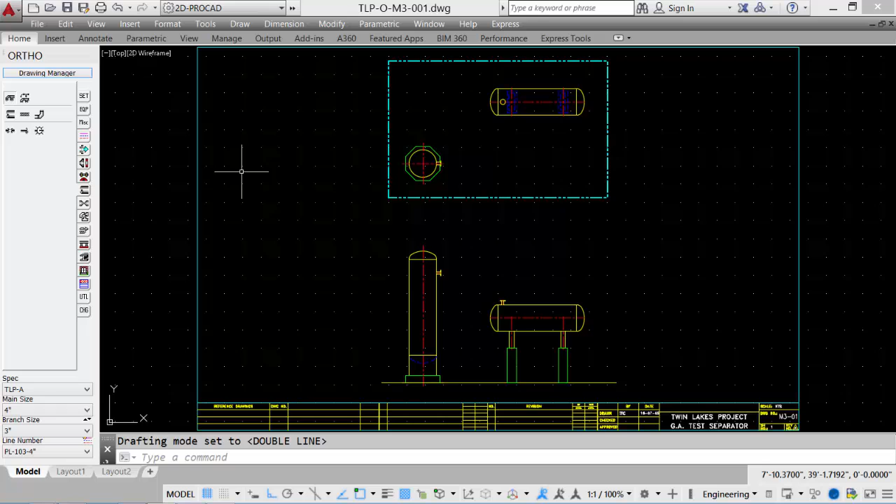Let's zoom up on the side of our drawing before placing any components on our equipment, and look at how the pipe tools work. Selecting our pipe tool, it asks for a start point and an end point, and a pipe is drawn. We change our pipe size to 8-inch and place pipe randomly. The drawing scale for this drawing is 1/8 inch equals 1 foot, so we can see the deviation between 4-inch pipe and 8-inch pipe.

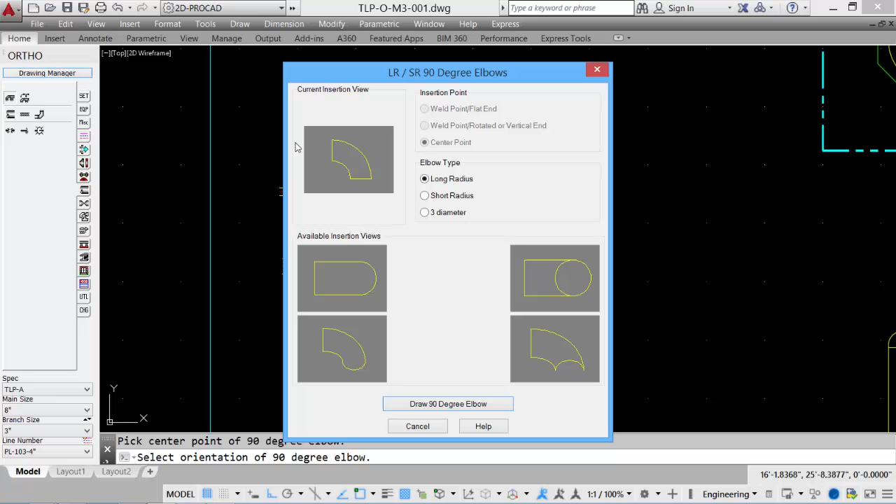There's a tool for adding pipe and an elbow. I can add one elbow or two; I'll just show one. We pick a start point, the center of the 90-degree elbow, and it asks which orientation we'd like, with options available and a default current selection. Then we draw a 90-degree elbow. It asks for a side for the elbow, and we can either pick down or up.

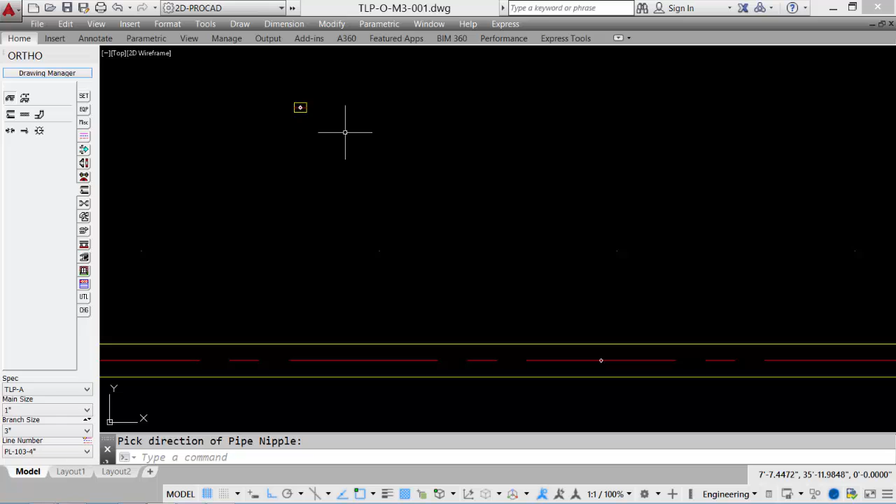There is a pipe nipple tool, so when we're down under 2-inch or less, let's go down to a 1-inch pipe size. We can now place a pipe nipple, and it asks whether you want it threaded both ends or plain one end. There is our pipe nipple at 1 inch to scale. We'll go back to 4-inch.

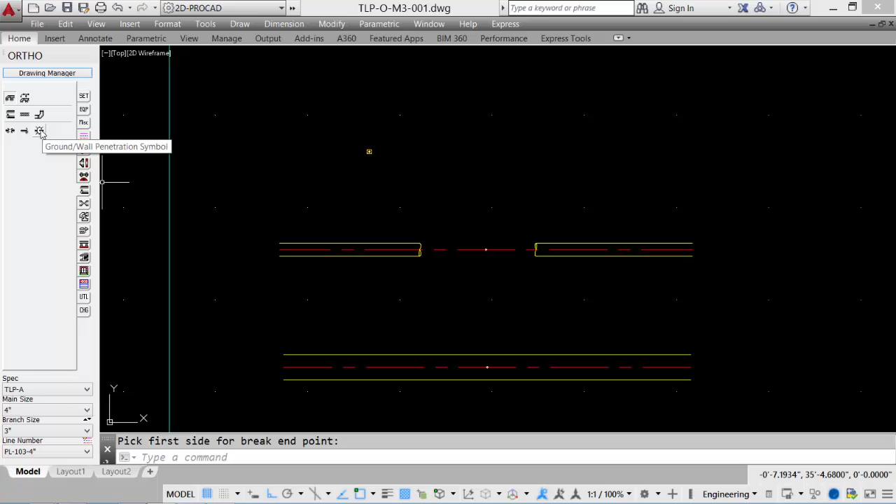Some of the other tools we have are the pipe ends. If we need a pipe break, we can pick one side of the pipe, the other side of the pipe, and then a distance along the pipe, and it breaks the pipe and shows our pipe break symbols. We can also put in a pipe end symbol or ground or wall penetration symbol by selecting our pipe, the other side of the pipe, and then the direction, and it puts in a pipe penetration symbol showing it going through the floor or through the wall.

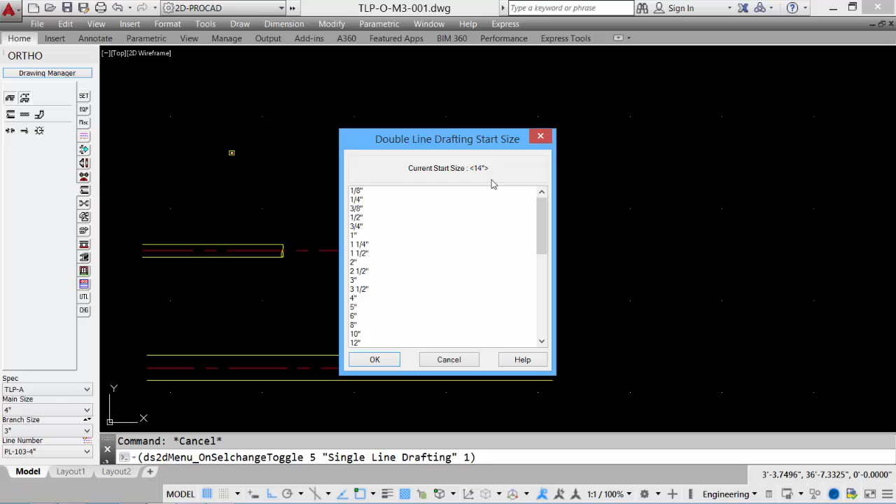In this case, let's set it to single line drafting and take a quick look. It always asks for when we want double line. Even though we're in single line, a lot of companies have a starting size of 14 and larger always drawn as double line, even though it's a single line drawing. So we'll just take the default.

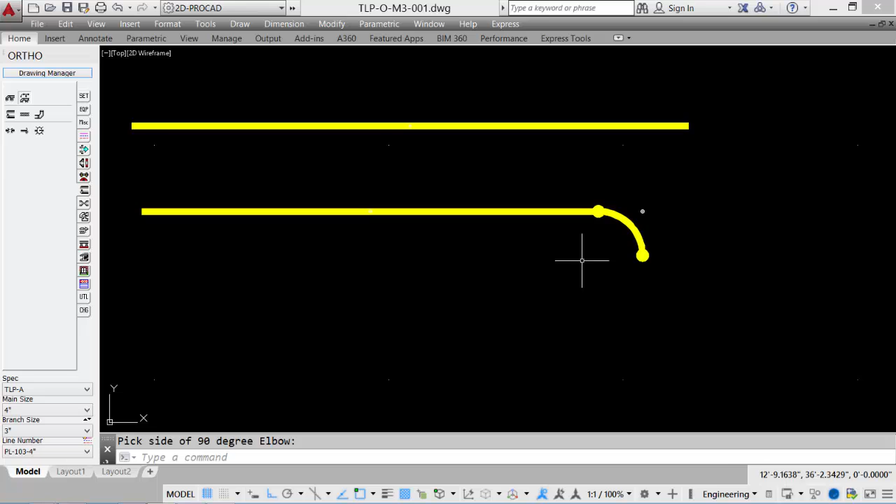Again, set it to 4-inch. Let's place some pipe, and now it shows up as a solid, thick line. Pipe with an elbow, take the default, point down this time, and now it shows the pipe plus a 90-degree elbow in single line. We'll set it back to our default.

Our next topic is the components. Now that we've covered the pipe and looked at all the different pipe options, let's look at all the other components. We have flanges, gaskets and bolts, all our different types of valves from gate valves to globe valves to ball valves, and all of our piping fittings: elbows, 90-degree to 45-degree, reducers, swedges, T's and reducing T's and crosses.

And things like weldolets, sockolets, and threadolets, all of those types of components that can be placed, all to scale, and all set by our spec, main size, branch size, and line number. So again, we always make sure we set this and change it as we draw to make sure we're getting the right components.

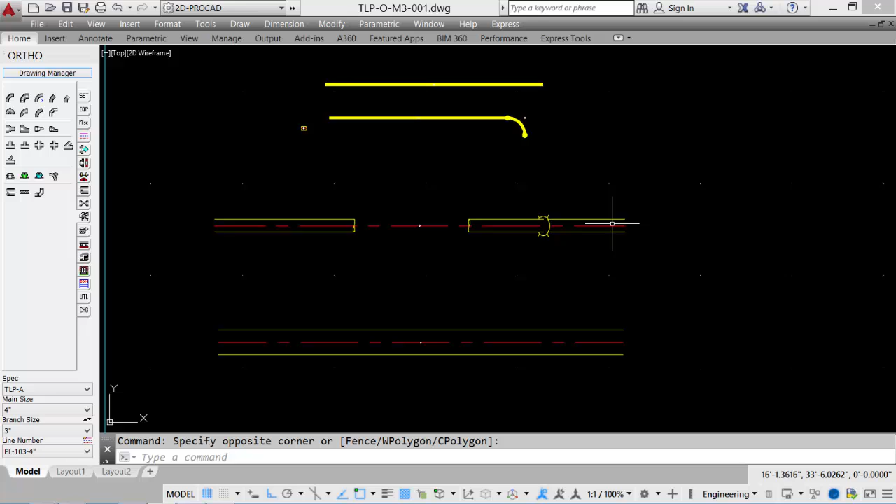But let's take a look at some of the basic components, things like a 90-degree elbow. Let's say I want to put a 90-degree elbow at the end of this pipe. Select our 90-degree elbow tool, and the dialog appears, allowing us to set the insertion point, either the weld point or the center point, and then the type of elbow we want placed.

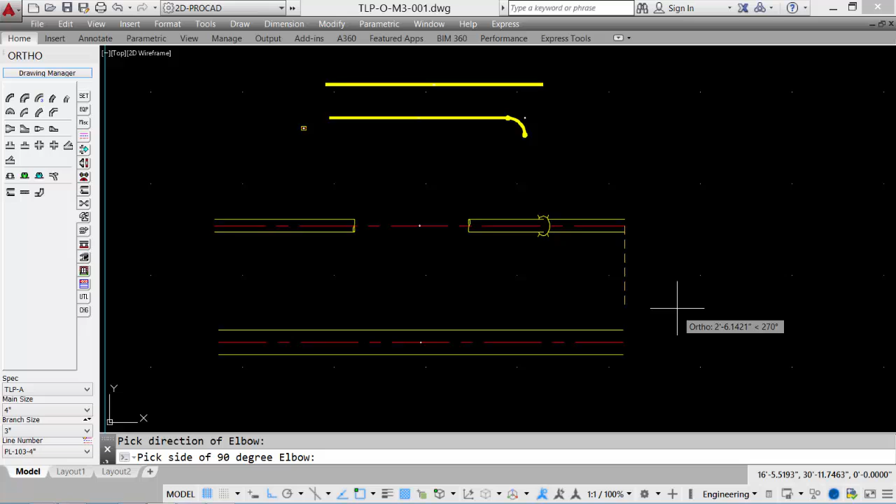It's a long radius elbow by default. Click Draw 90-degree elbow and pick the end of this pipe. First, choose the direction of the elbow, down or up. We'll go down in this case, and it attaches the elbow to the end of the pipe.

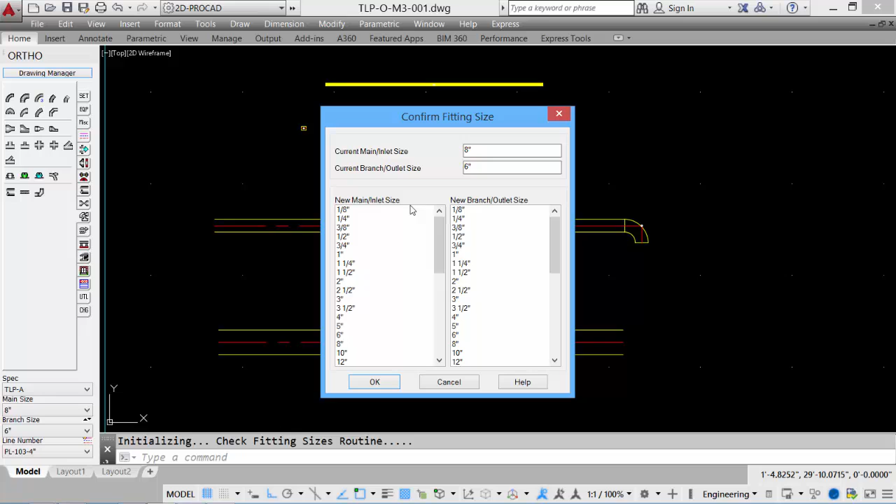We can come down to our sizes. Set our main size to 8-inch, branch size to 6-inch, and select a concentric reducer. It shows us the sizes, which can be changed, but we're picking up the current sizes, so we'll say OK. I'll pick this end of the pipe direction, and it now puts in an 8x6. Notice in the status area that our main size has automatically switched to 6-inch from 8-inch.

Let's look at placing a flange on our drawing. Select the flanges tool, select a weld neck flange, select the insertion point, and we'll select the weld point. Click OK, pick the end of the reducer, and the direction. Our 6-inch flange is now placed.

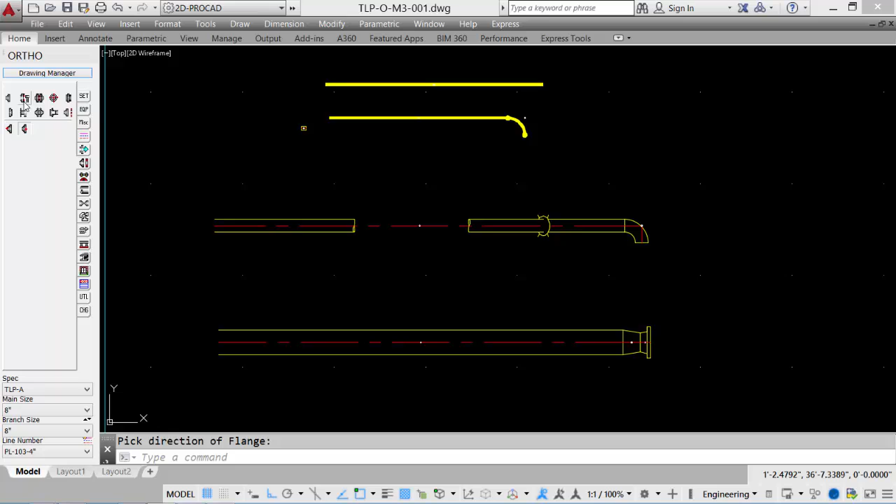Let's place a flange at this end, and we'll include a gasket and a bolt. First, we'll set our pipe size to 8-inch, then select the flange gasket bolt tool. Again, select the weld point, click OK, pick the end of the pipe, drag to the left, and it puts in a flange and gasket bolt. These symbols will not plot—they're on a layer called Defpoints and don't plot, but they're shown so the drafter can see that the gasket and bolts were actually placed within the drawing.

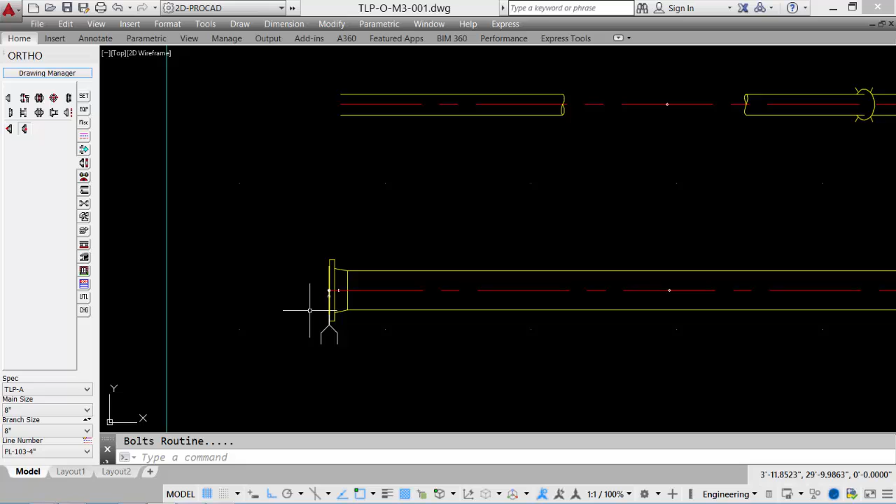We can place a flange off of this elbow here, then go to a 4-inch size. So again, I'm changing my size as I draft—pick the flange, then pick the end of the elbow and drag down, and the flange is placed in that orientation.

Let's look at placing some valves. I'll go to my valve tab, where all the different valves are displayed. You can set it at flange, gasket, and valve; gasket, valve, gasket, and flange—so if I had an existing flange I want to draw from. Or if I just wanted to put in a full complete flange and valve set, it would be flange, gasket, valve, gasket, and flange.

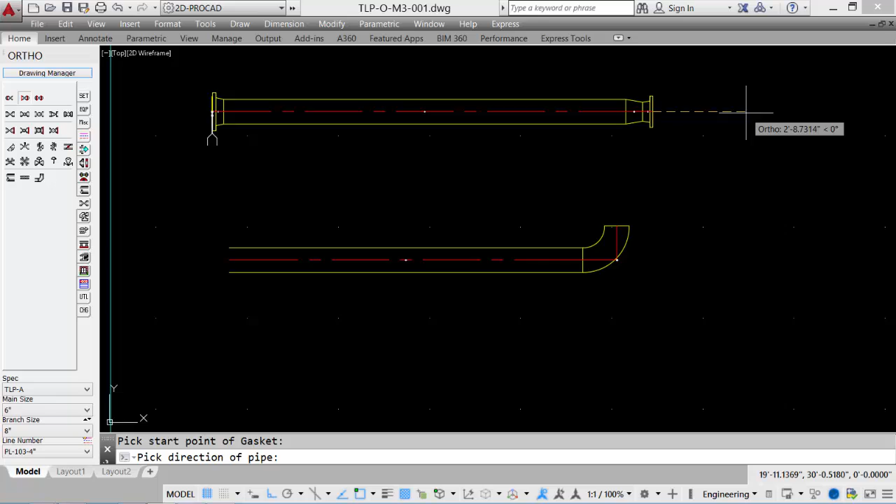Let's just put in a valve off of the end of this pipe here. First I'd set my pipe size—we know that's 6 inches. I have an existing flange but no gasket, so I'd set it to the second item. Then let's just put in a gate valve. Pick up the end of the flange, pick the direction, and it now adds the gasket and bolts in.

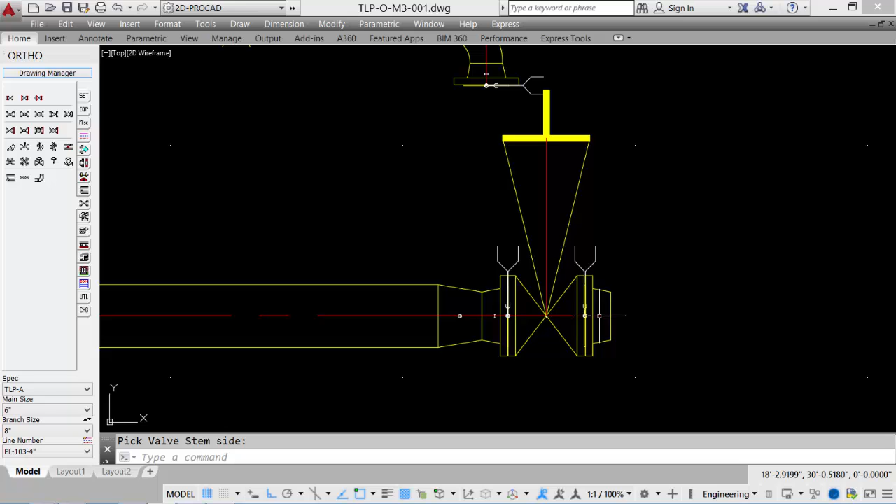Then it asks if I want a valve stem, and we can say yes or no. If we say yes, what orientation do we want—plan, side, or rotated? We'll say side, say OK, and pick the side we want the hand wheel to show up on. Then it completes the valve—there's the valve stem, another gasket, and another flange. So placing components is quite simple, just a matter of setting our size and then selecting the components.

The next topic is info blocks. Once we've completed or worked on a drawing, we want to know what size a pipe or component is. Under our settings tab, there's an item info tool that lets us select, for instance, the pipe, and it tells me it's 8-inch pipe. It tells me the spec, the line number, and a description—all set up in our spec generator.

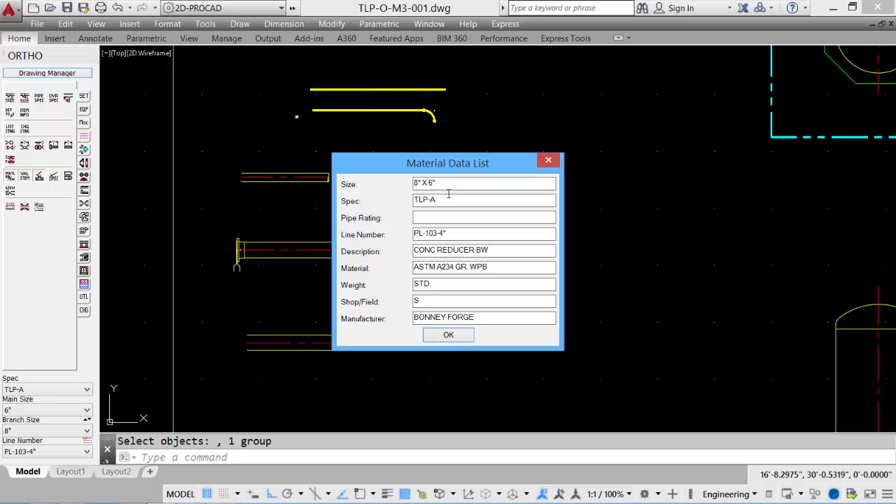So it's a good way of finding out what size components are if we're not sure. I selected my reducer, an 8x6 concentric reducer, and all of that information is shown.

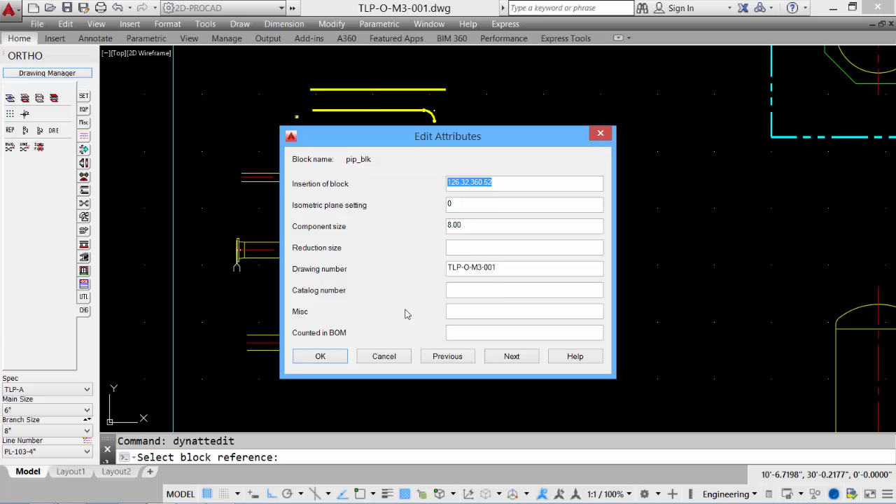For a more detailed view of a particular component, under the Change tab we have our Dynamic Attribute Edit tool, which lets us edit the information shown on a component. It also shows the component name and the file location within the software—so if you're looking for the exact file where that pipe is located, it tells us the spec, the location, and the component. We can select Next, and it tells us the information, dimensional data, and all the information regarding that symbol—very useful if you're editing or adjusting the spec or material data files.

The last topic in Module 3 is the autoroute feature. We'll look at placing components automatically, and then we'll look at placing in our drawing the piping in the plan view and in the elevation. So how the autoroute feature works is it allows us to, rather than having to pick the end points for instance, placing that elbow, I can have the system automatically do that.

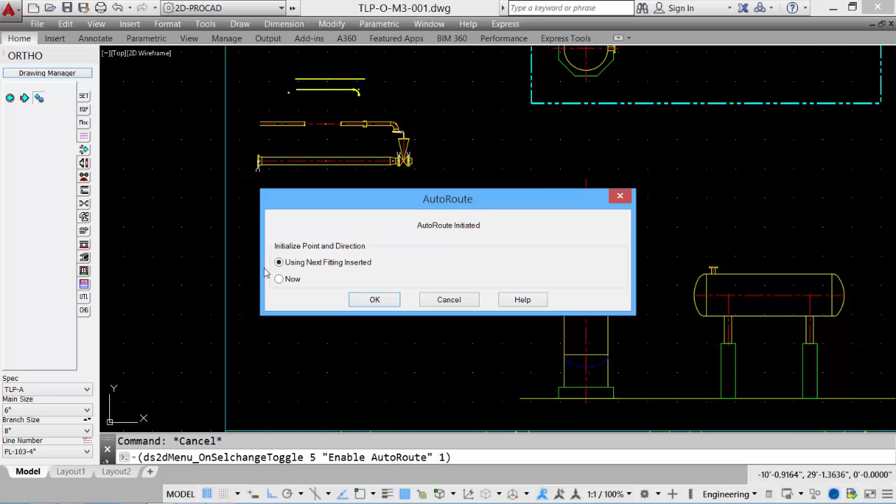So we'll go to our autoroute feature, and we'll enable the autoroute. It asks if we want to start it now or using the next fitting. I'll just use the next fitting. And now I've set up my sizes. Let's say we'll set it to 8-inch to 6-inch, just for this sample. And then we'll go in and place some pipe. Click our pipe tool, and it places pipe like normal.

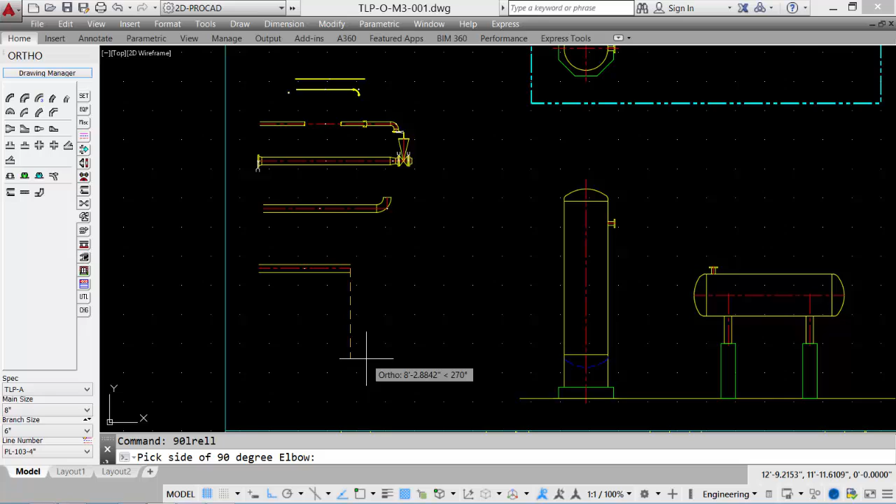But now, when I add my next component, let's say we add an elbow to turn down. Say draw a 90-degree elbow. I don't have to pick my start point. It's automatically selected as the last point. So all I have to do now is pick the side of the elbow, and the elbow is drawn. I can then pick some pipe, and the start point of the pipe is automatically at the end of the elbow. Place another elbow. This time I'll go to the right, and it automatically places the component. So as long as we know the dimensional data, we can quickly route the pipe.

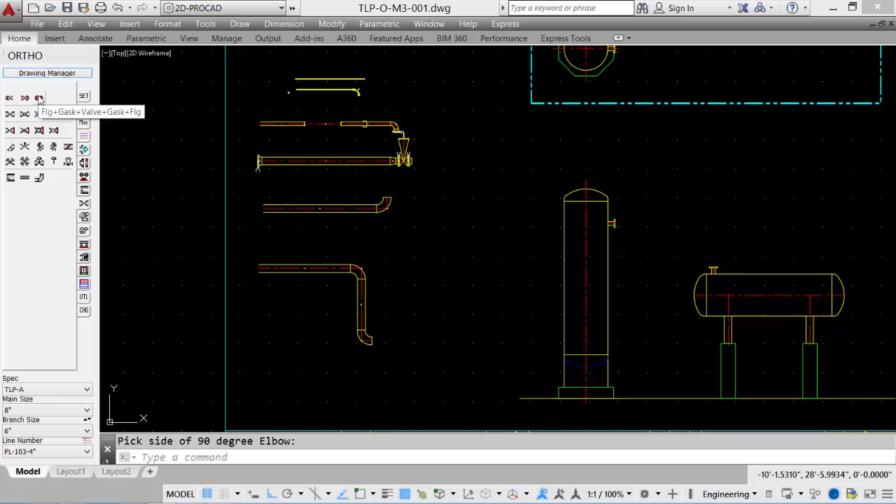Let's go in and place a valve. I'll select my valve with the flange and gaskets. We'll pick everything, and then we'll pick the gate valve. Again, we'll go to the side. There's the side. It places the flange, gasket, valve, gasket, flange, and places it automatically on the end of the elbow. I can then add a piece of pipe.

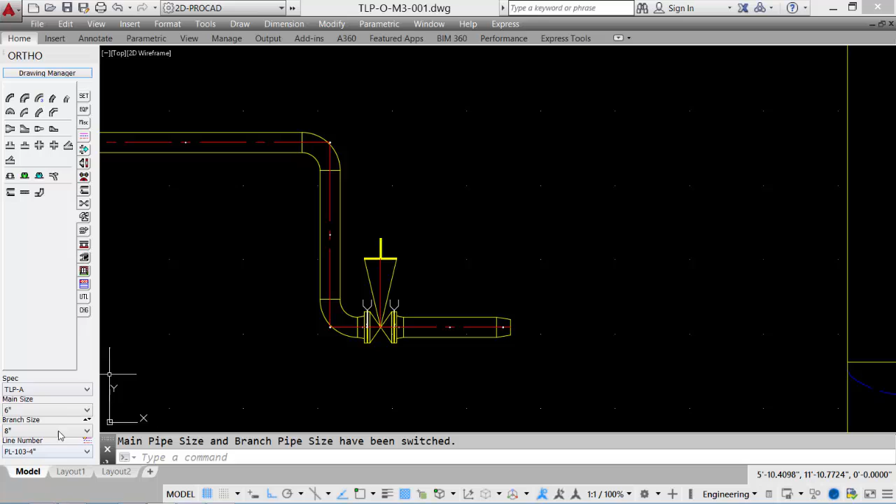I can go to my fittings and say do a reducer. Automatically places the reducer. It automatically changes the main and branch size as well. So now if I place some pipe, very easy to do. At any time, we can disable just by going back to our autoroute and disable the autoroute. We can now place components individually. So let's erase all this extra piping and components.

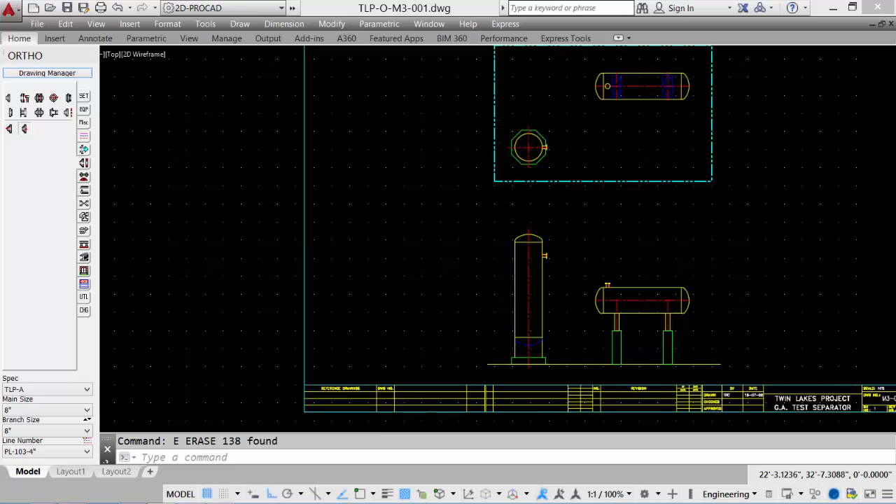And let's look at adding the pipe to our drawing. So let's place our pipe and fittings and components. We'll start with our elevation. So I'll set my sizes back to 4" to 3" for my branch size, because these are 4" nozzles. And then we can actually go in and start placing the components. If we know all the information, we can actually enable our autoroute feature.

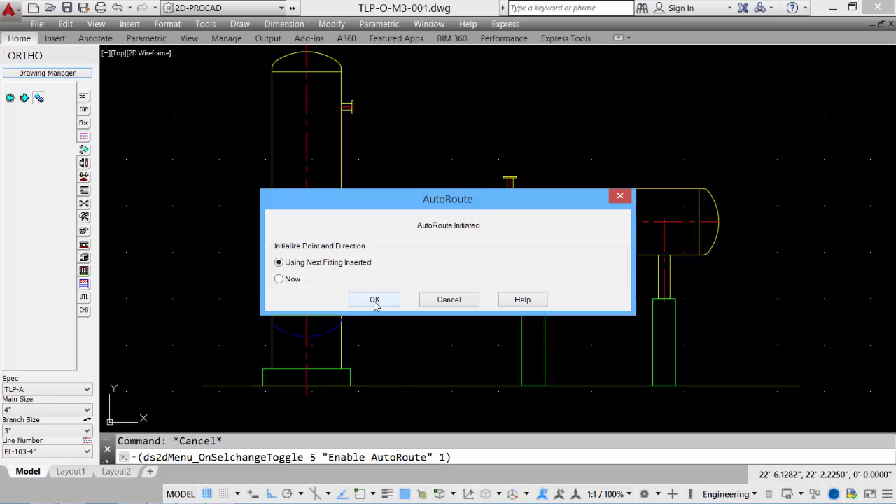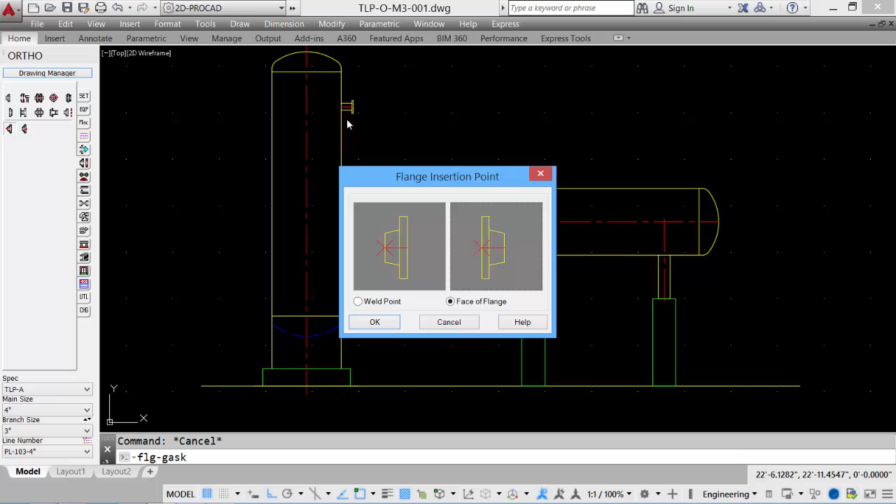And we'll start off. So what I'm going to do is we'll draw a piece of pipe with a flange and elbow. We'll come down through a valve down here. We'll come back up with some pipe, and then we'll tie off into the top of this nozzle here with another flange. So we'll pick our flange and gasket tool, select the face of flange, because we're going to mate up with this face of flange, and say OK. Pick the start point, pick the direction, and it places the gasket, bolt, and the flange.

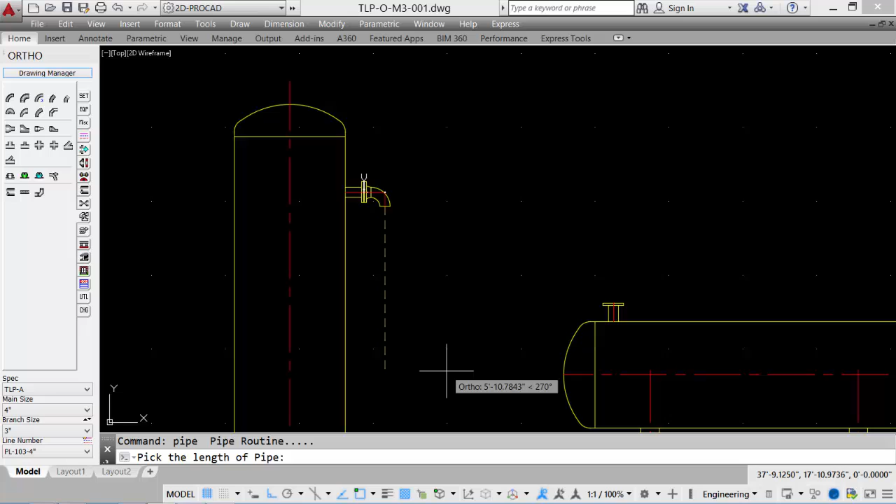I can then go to my fittings, place my 90-degree elbow. We're going to point it down, so that's the correct orientation. Select down, and there is our elbow. We'll put in a piece of pipe, taking it somewhere near the bottom of the drawing. I'm just going to guess. We'll add another 90-degree elbow. And then let's say we want to put in a block valve. We'll put it on this side. And then there is our valve placement, all automatically with that autoroute feature.

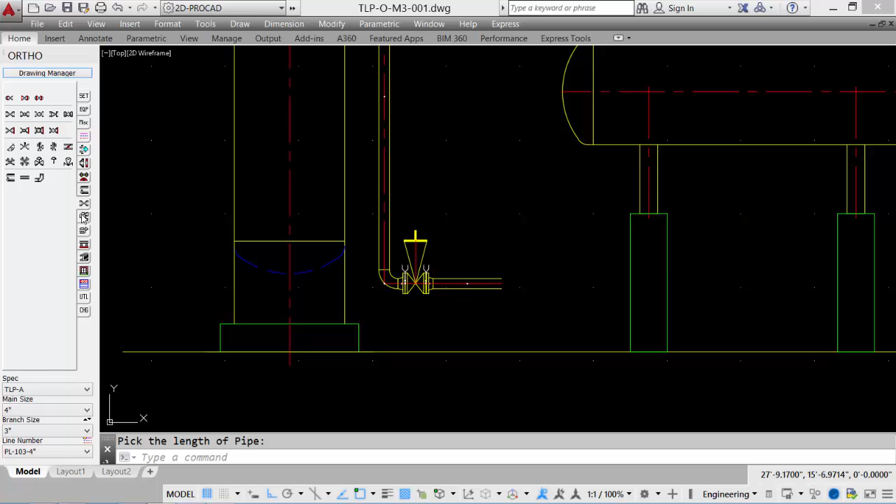Place another piece of pipe, random length. Then we'll go into our fittings, elbow pointing up, piece of pipe. And I'm just going to take it somewhere up near the top here, because we're not quite sure. What I want to do now is add a flange and an elbow coming off of the top of the vessel. So I need to turn off my autoroute feature. So we just disable it, and then we go back to our flanges.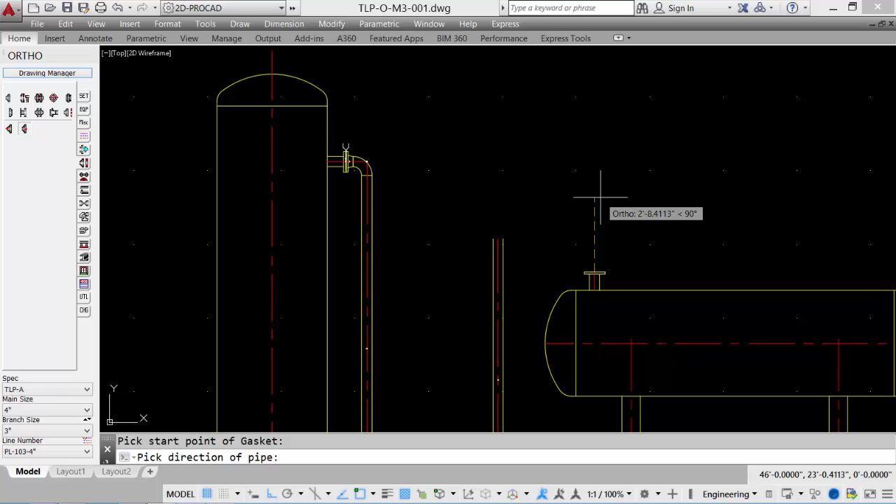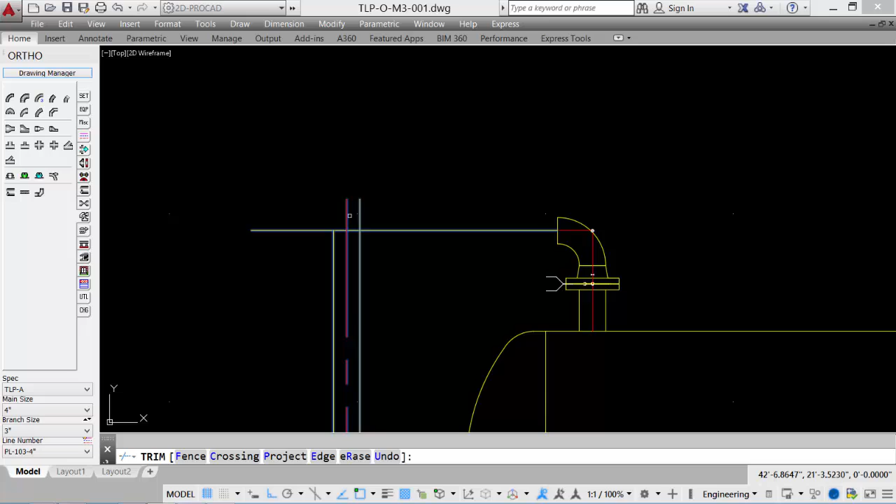Select our flange gasket bolt, pick the top from our nozzle, and our weld neck flange is placed. We can then go into our fittings, place a 90-degree elbow, pick the start point, and then the direction. Now we can use an AutoCAD line command just as a trimming feature, and then we can trim off to get it to the center line. So really what we're looking at here now is this center point.

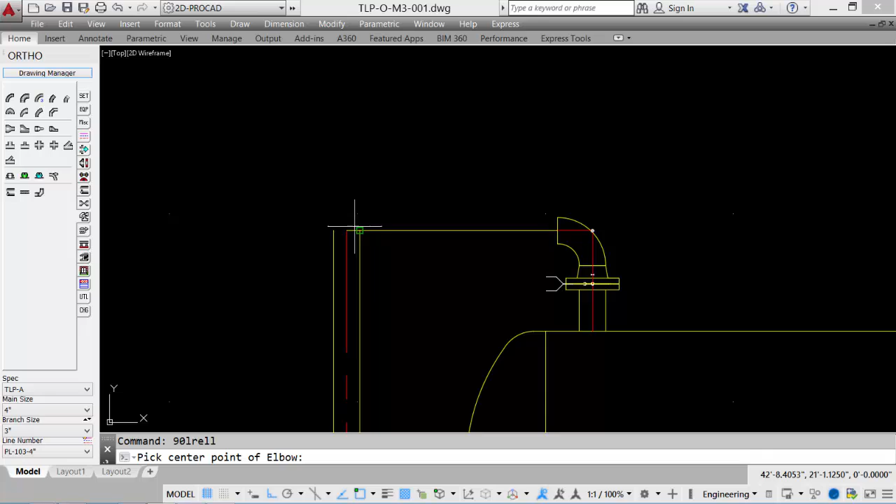So now if I place an elbow in that elevation, we'll be coming up and turning into the drawing. So this is the orientation we want. But I want now to select the center point and then pick my 90-degree elbow. So my 90-degree elbow would be center point, and then the flat side would be pointing down. We can see now the elbow is pointing down.

We would have an elbow on the back side of this turning to the right to match up with this one, so another 90-degree elbow. This time we would use this orientation, and again the center point. So we pick our orientation, draw the elbow. We're going to pick up the center of that current elbow, and then the flat side of the elbow is placed. The white circle does not plot. It's just there as a reference so you know it's a 90-degree elbow.

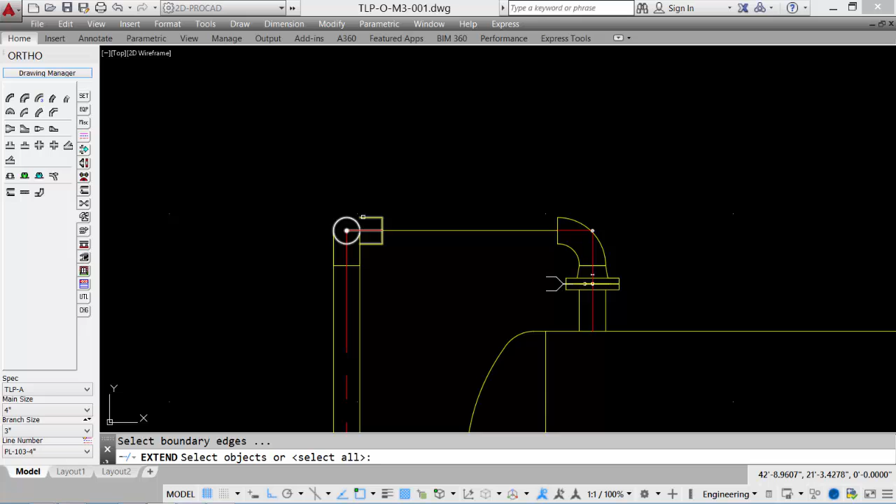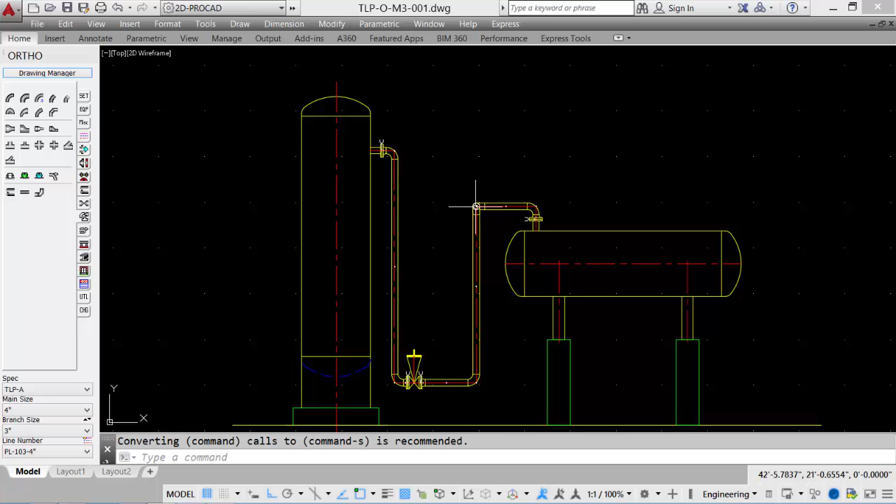And we can use our extend and trim tools to fix any features that need to be extended. And then we can get rid of our construction line, and we can place a piece of pipe between the two elbows to finish off that view. So there is our elevation view, elbow down, turning down, through an elbow, through a valve, through an elbow up, through an elbow going away from us, turning to the side, and then coming down into the top of the vessel. Let's look at doing the plan view of that same feature.

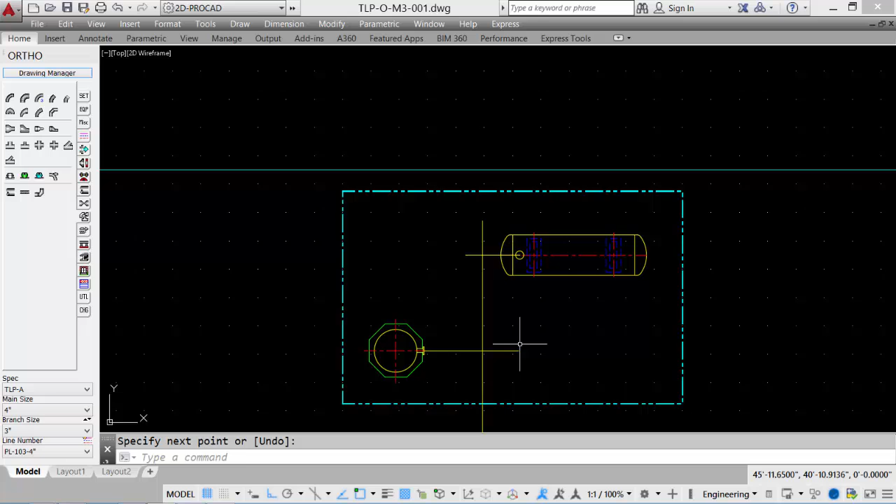So again, we can do a little bit of orthographic. We can grab a line using our AutoCAD and pick up the centers of these flanges to kind of give us an idea of where some of these components are going to be coming from. So there's just some construction lines that I can use as guidelines. We can go to our flanges. Face of flange coming off of a vertical vessel. There's our flange coming off.

Go to our fittings. 90-degree elbow. This one would be turning down, looking from the plan view. And we would want the weld point. Pick up the end of the flange, pick the direction, and there's our elbow turning down. So underneath that is a vertical run of pipe.

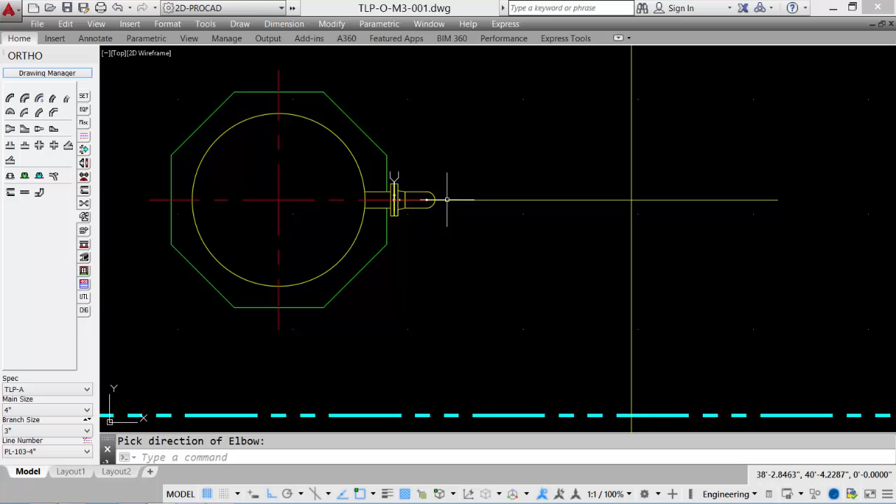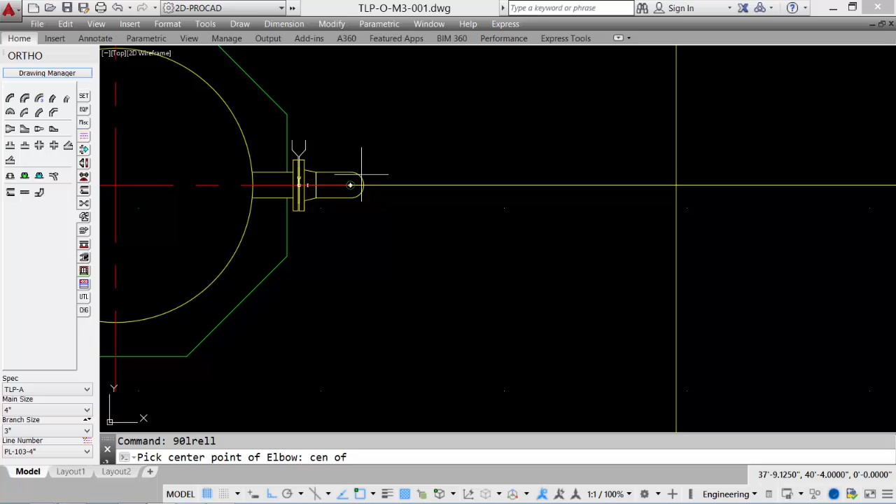And then if we look at our elevation view, we have the elbow that turns and then goes through the valve. So again, on this view, we would select our 90-degree elbow, select this one for the orientation, and again, center point. Draw the 90-degree elbow, and we want to pick up the center of that existing elbow, and then the direction. Again, we can use our extend and trim tools to extend the lines from that fitting to the existing elbow. And then now we're looking at the top view of the valve.

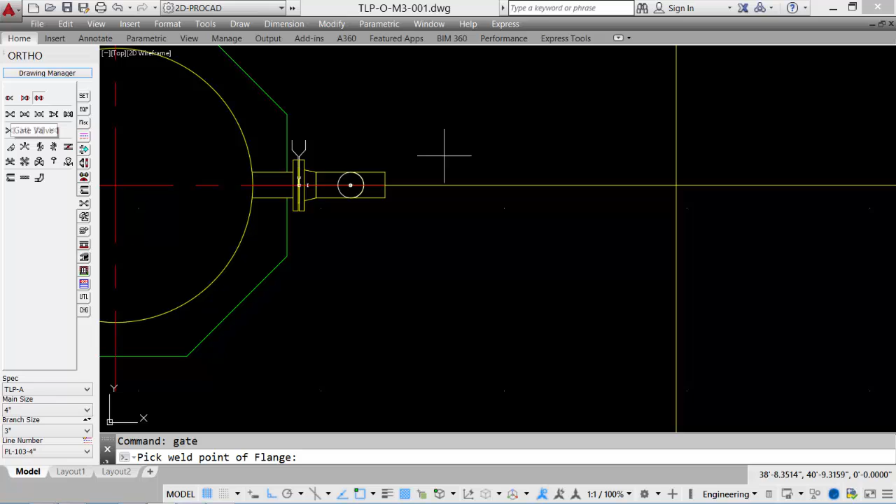So we'll go to our valve tools, pick the same valve. Pick the start point, the direction. This time the stem will be in the plan view, so we'll just take the default. And it shows us the hand wheel in the plan view. Now we have this intersection over here where the elbow turns up, where we haven't placed the pipe. We can go to our elbow and pick the center point, and that's the elbow we want. So we can draw that elbow from that intersection back.

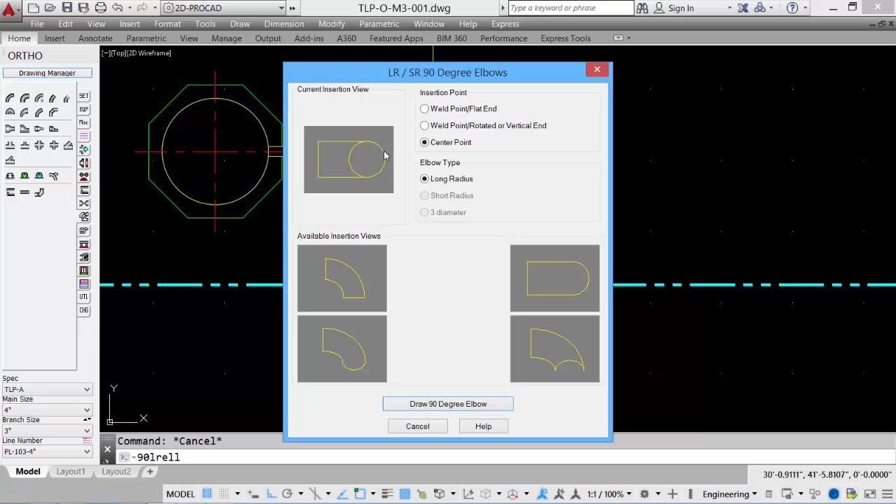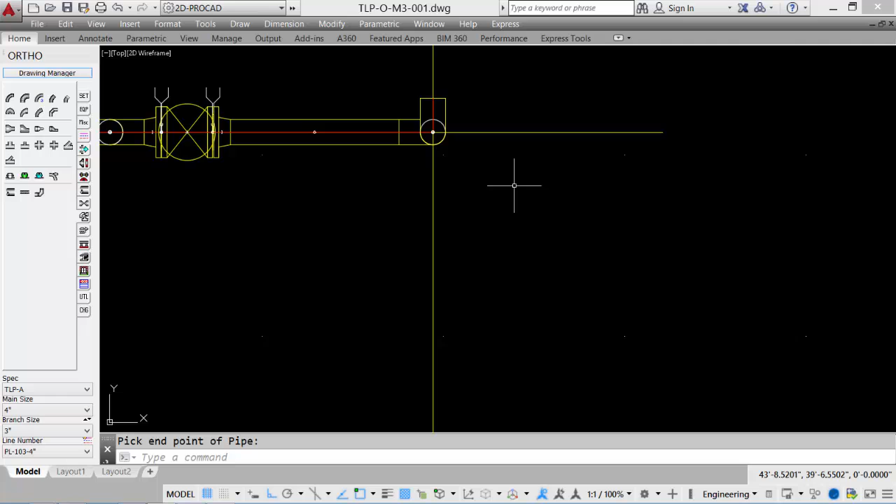We would then have an elbow that's turning away, again with center point. We can pick up the center of this existing elbow, give it the direction. We can extend our lines just to finish that off. And then we can add the pipe in between the two fittings. So this is looking down on that piece of pipe. So now we have a flat elbow going to come and turn to go into this one.

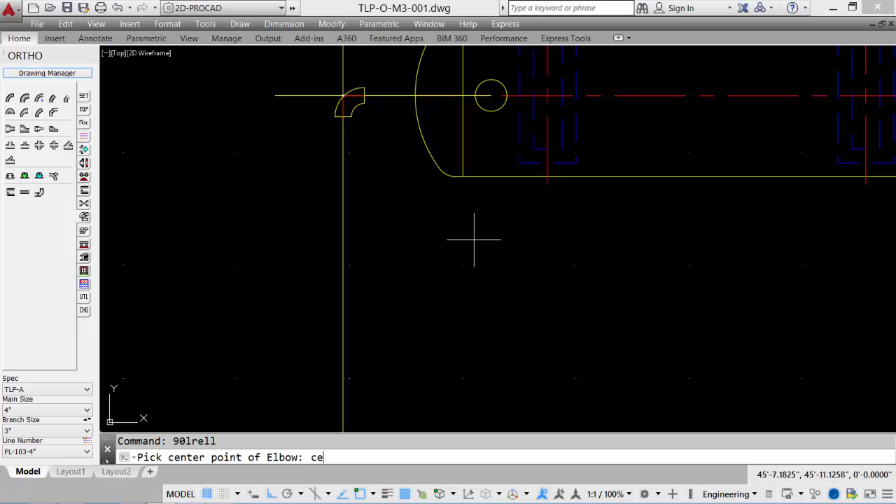We can place the elbow. It'll be a flat elbow. By center point, using my construction lines I placed, pick up the intersection, one side, the other side, and there's our elbow. We then have an elbow that turns down into the flange. So we can select this item, center point again, and we can pick up our center of our nozzle. And there is our elbow. We can use our trim tools to trim out some of these features, add the pipe in.

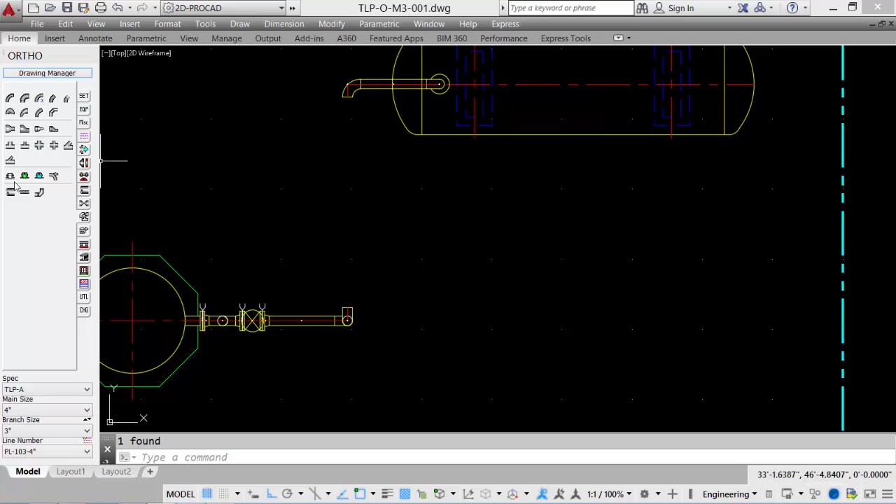I can then erase my construction lines that I had and finish off my pipe run with the length of pipe between elbows. And now we're complete. So there is the piping for our plan view, and then the piping for the elevation. Let's save our drawing. This concludes the topics covered in Module 3.